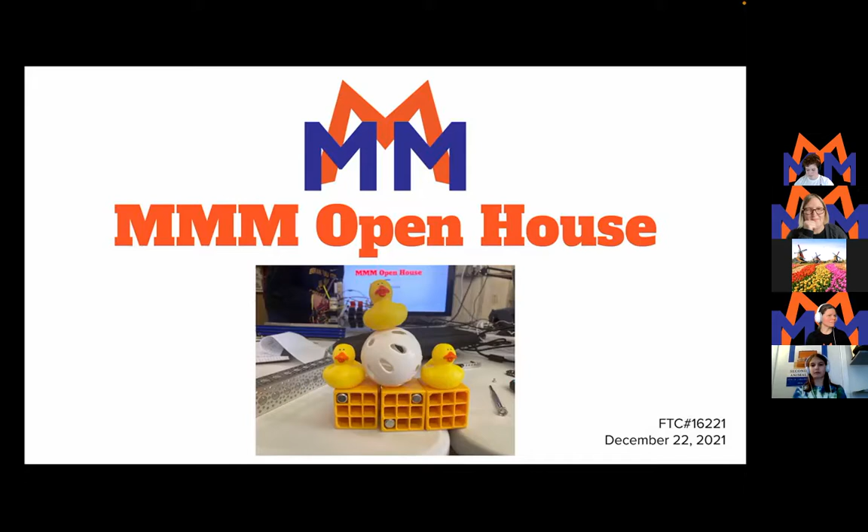Here is Dakota just giving some context for those who don't know us that well yet. All right, so my mic is working, right? Yeah, yep, all right cool.

FIRST is an organization that encourages involvement in STEM. Every September they release a challenge, and we have until February or March to design a robot to complete it. This year's task is called Freight Frenzy. We need to be able to move cubes, balls, and possibly rubber ducks into a multi-tiered shipping hub, as well as detect different colored lines on the field and detect specific objects on the field.

We, the Manchester Machine Makers, were established in 2019 by Mike Cole, who is present. We are under the umbrella of 4-H. This year, 2022, will be our third year competing. We have grown from a team of 5 to a team of 9, with students from all over the Bennington County area.

Since we are an FTC team, an important part of what we do is outreach. This past year, we have received a donation from the Orvis Charitable Foundation for $500, and a donation and internship opportunity for team members from Engineered Printing Solutions in East Dorset, VT, EPS, marking the beginning of a partnership of support and mentoring.

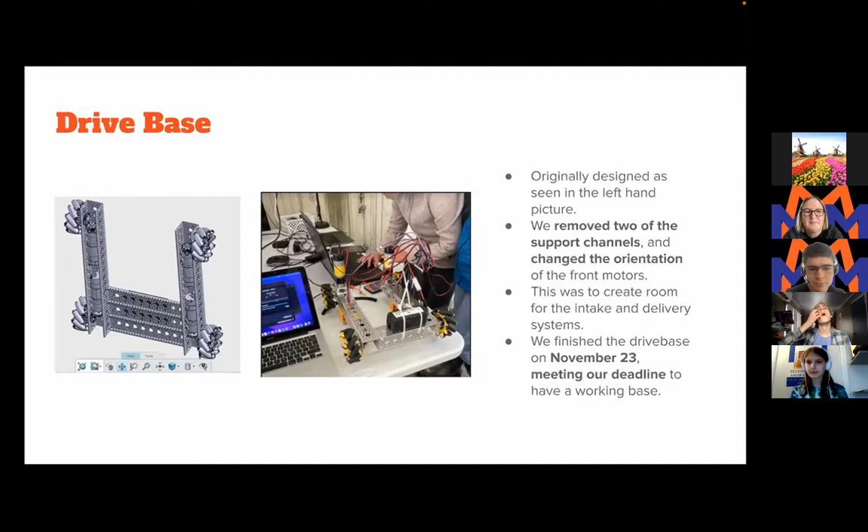It was originally designed as seen in the left-hand picture, but we then had to change it a little bit. We reoriented the front motors and removed 2 of the interior beams, just because of some size constraints and some issues with tolerances and not being able to fit the intake and delivery mechanism. The picture on the right is our current drive base, which is working.

There are some videos on this next slide. The first one is just us testing the wheels, making sure it could turn on and work. The one on the right is us doing our first drive on November 23rd, which we were all very happy about.

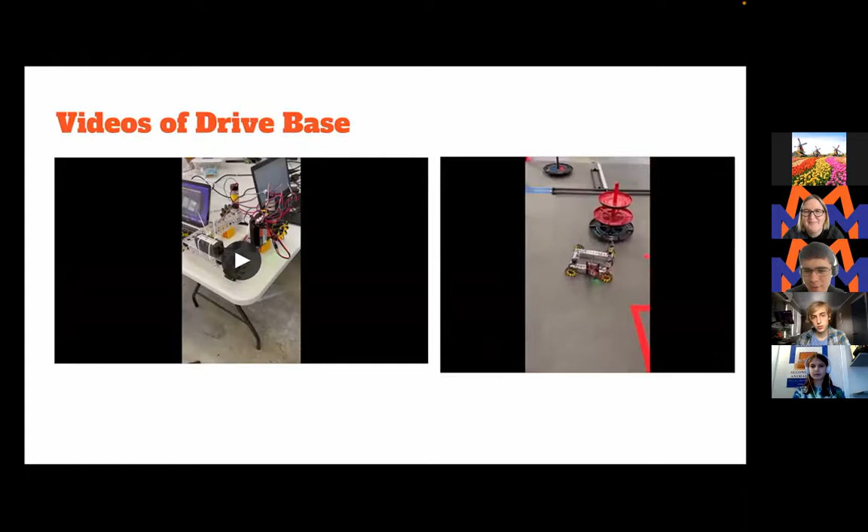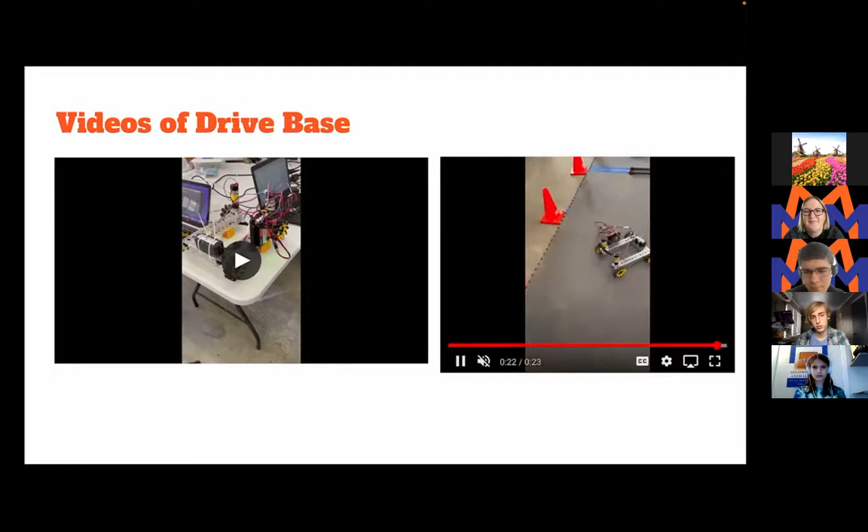All right, intake. So basically for the intake, the main goal is to bring in only one game element at a time into the robot, and that's also called a piece of freight, like you saw earlier, like cubes and wiffle balls and stuff.

Our idea is to have rows of compliant paddles made from trimmed wheels. We're going to trim the outside off of these wheels, and we're going to guide the elements up into the robot and then into the delivery chute, which you'll hear more about later. So we'll have these flexible rows of wheels, which will be able to accommodate freight of different sizes.

That was one of the challenges, because they're not all the same size. And there's going to be a motor in one of the vertical channels that's going to drive a sprocket, which will be chained to the other axles and make them spin too.

In addition to this, we had to design some plexiglass for the robot to kind of guide the freight up a little bit, because it's not just straight, it's got to go up into the delivery.

We're almost done with our first prototype. Well, we are done, but we are going to need to get slightly different parts, because right now the bearings that we're using made the whole thing kind of loose. So we haven't gotten a working prototype of it yet, but we're really close once we get these parts.

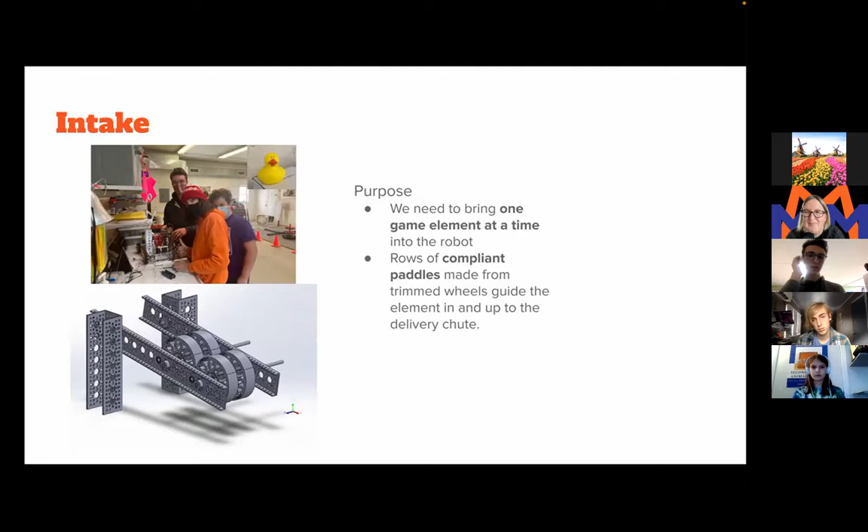Some of the challenges we faced: all the freight have different sizes. The ball is the largest, the duck is the smallest, and the cubes are medium size. We can't have the wheels set to bring in only one size, because then the wheels would not reach the duck.

The intake has to get close enough to the delivery system so that we can get the freight into the delivery, but it cannot block its functionality.

Currently, the channels that are supporting the wheels are a bit too big and would interfere with the delivery. There are like two holes too big.

The delivery system starts a bit off the ground, so we have to create a plexiglass ramp to bring the freight up to reach the delivery.

The rules of the challenge specify that we're not allowed to handle more than one piece of freight at a time. And on the playing field, all the freight is together in a space, so it will be hard to only spin one piece into the system.

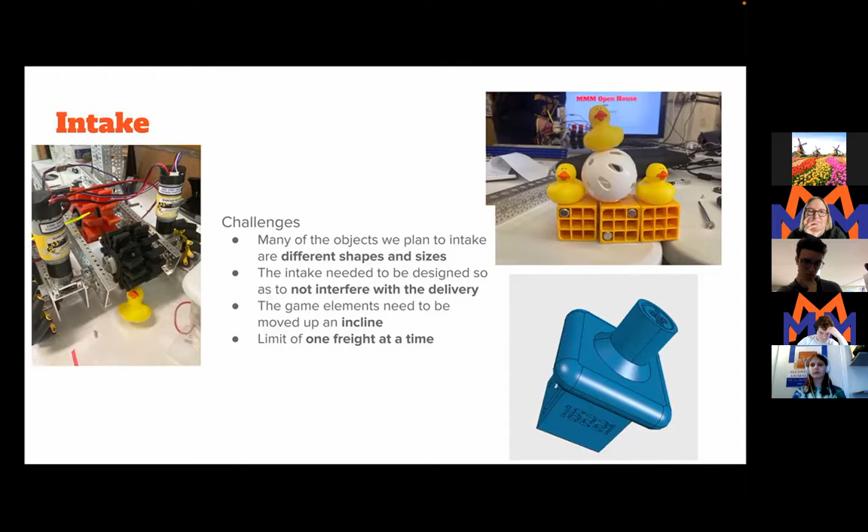For the intake, we use different components like the wheels, which we use to bring the freight up. We use the frame to keep it all together. The motor spins the wheels, as Amos said. And we use the plexiglass to create a ramp that will bring it into the delivery system.

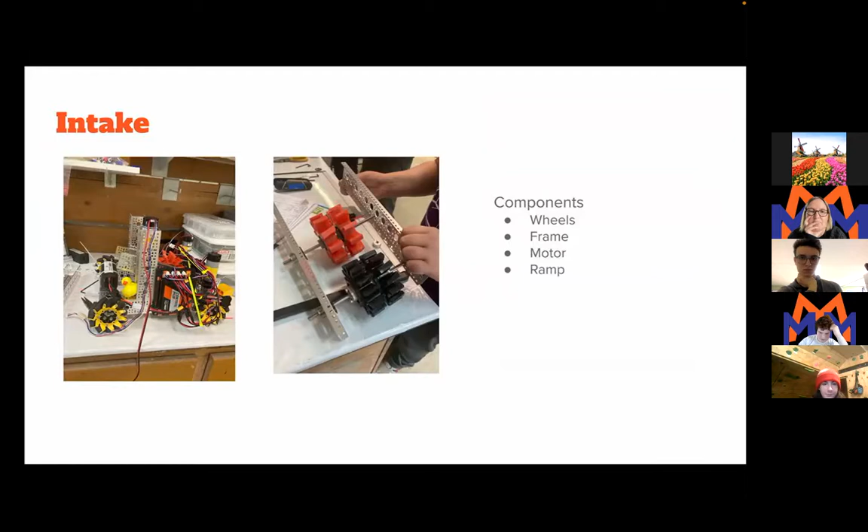Then in between the slides, there's going to be a chute, which holds the field elements. And that chute can tilt up and down to dump out the field elements using servos that it's mounted to.

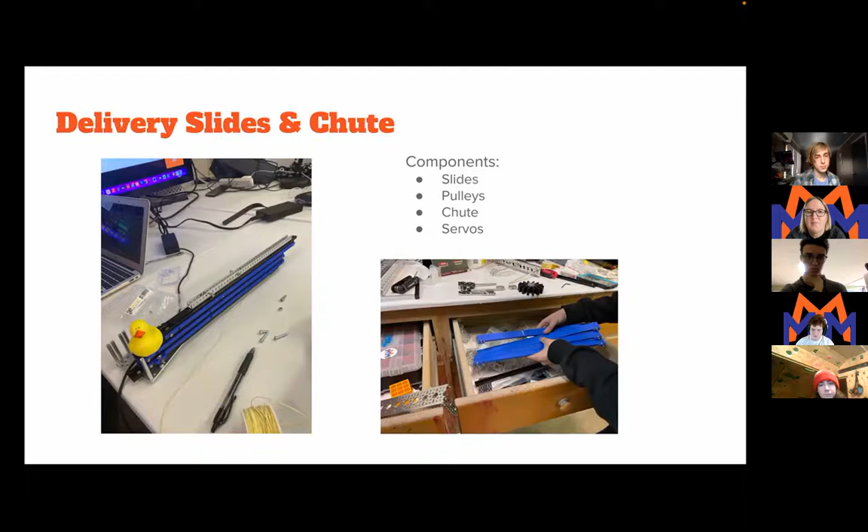And so here's a video that someone took the other day of our current set of slides.

And right now we have 3 stages of extension there, which is 690 millimeters, or about 27 inches.

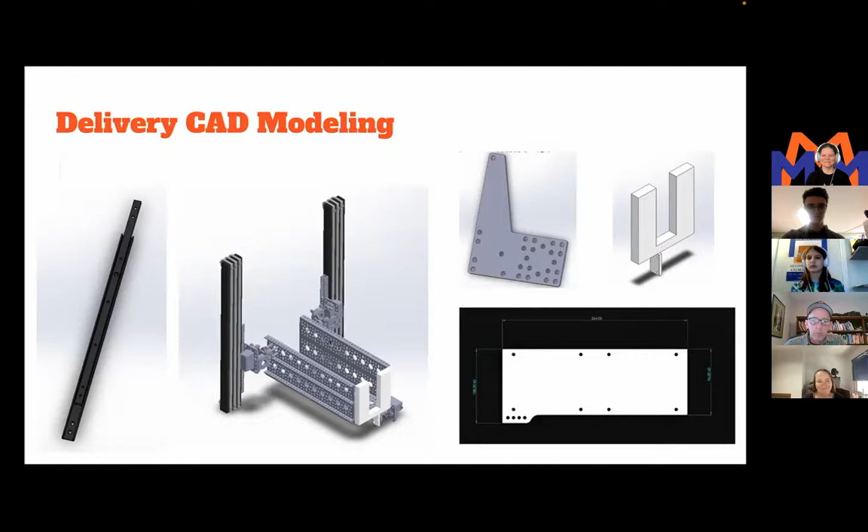We've been doing a bunch of cool stuff in programming this year. We write our code in Java using Android Studio and also various other editors. Then we upload the code onto the robot control hub, which is a little box, the brain of the robot, and it's Android based.

We have a phone which has a driver station app on it that wirelessly connects to the control hub in order to run op modes, which are like teleop or autonomous, to run different programs and control the robot. We have controllers hooked up to the phone that can control the robot, which we'll talk about in a later slide.

We use TensorFlow for machine learning, and we helped beta test a tool that the First Tech Challenge is creating that allows you to just upload images and it'll create a machine learning model that can recognize those images for you. That was really cool, really nice.

We also have a diagnostic system for the robot where we can just put a file in a specific folder and reference it in another file, then run it as part of a diagnostics op mode in order to test out all of the different parts of the robot. That's been very useful as well.

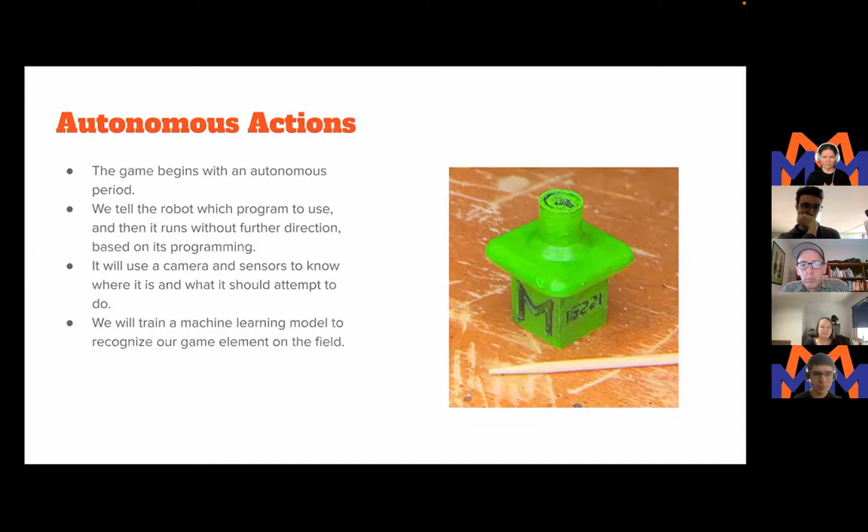During the teleop phase, we use a game controller connected to the control hub. Actually, we use two game controllers connected to the driver station, not the control hub, to allow two drivers, usually one for driving and one for delivery, intake, etc., to control the robot.

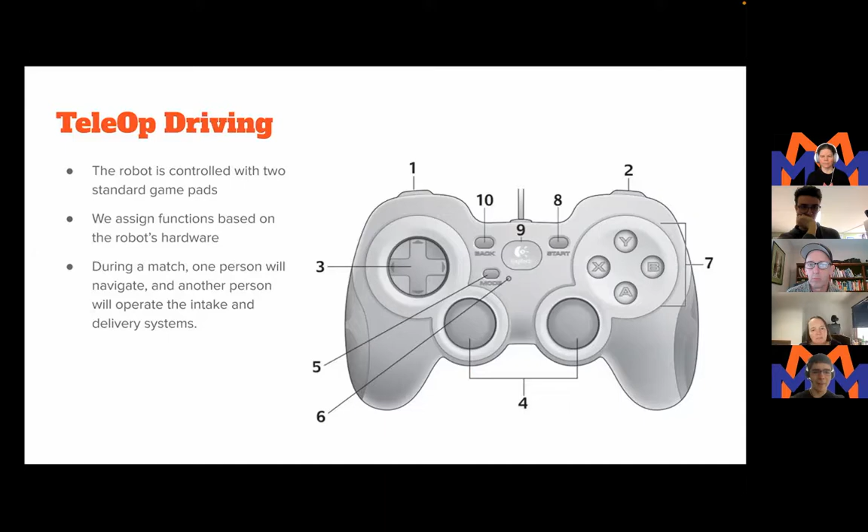We spent a while deciding on what controls would do what, depending on previous members' experience with what worked and also new members' input with what they would like.

So we've given a brief run through, and by brief I mean sizable length, of what we've been up to. What we're doing next is we're hoping to complete the intake and delivery systems and then attach and wire them into our drive base sometime in the coming month.

After we do that, we will practice, test, and modify our designs to have a working robot, improving them and editing them to make them work as best they can.

We are also going to be focusing more on software design and implementation of that on our bot, as well as focusing on design elements of our robot. So ideas have been stuff like having lights, sounds, and fun numbering.

We had this idea of etching stuff into plexiglass, like having our team number on there. That would be pretty cool.

In February, assuming that we achieve all of our goals in January, we would be fine-tuning our driving, our software, and our robot, as well as fine-tuning our scoring strategy. That is a big part of our game and our game plan, as well as it informs how we build our robot. So that is something that we need to fine-tune.

We would hopefully be able to go to a scrimmage. There are many more Vermont teams now than there were 3 years ago, so potentially there will be a scrimmage this year, assuming COVID doesn't get bad again. We're also planning to do more outreach with local teams in Vermont and/or New York, and we're going to design and order our team shirts for our final competition in March.